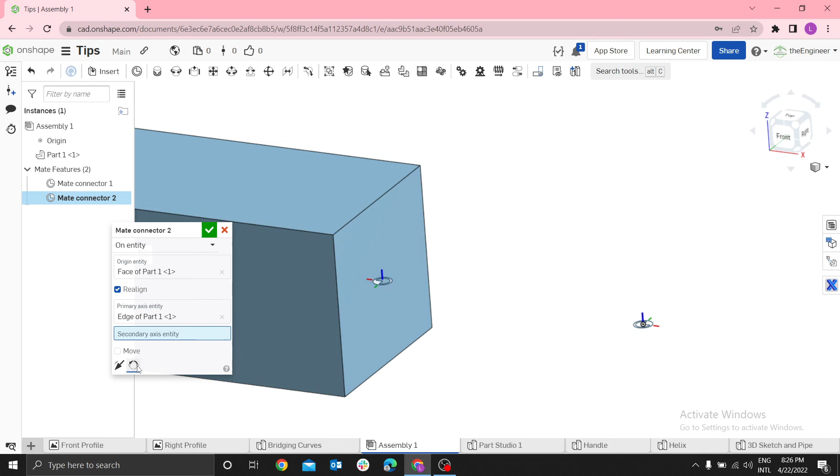Now you can see this mate connector and this mate connector face the same direction. In case X, Y, Z axis are different, you can always rotate along the primary axis like that. Then select OK, and lastly select mate. I'm using fastened mate, selecting these two mate connectors.

As you can see now, the part moves to where it is supposed to be. Okay, that's how you mate your part using a mid origin mate connector.

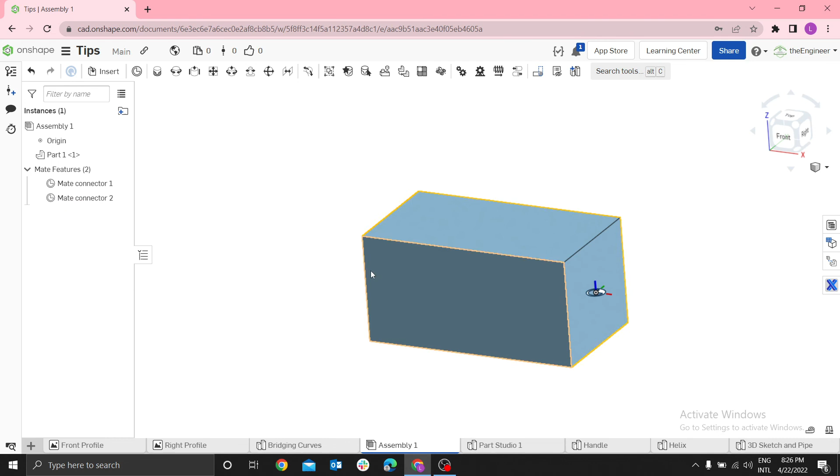Let me delete this mate and illustrate something else. Let me delete everything. Assume I need an angle. This one, as you can see, is horizontal like the x-axis, but I need this body to be at an angle, maybe at that angle to the origin. How can you do that?

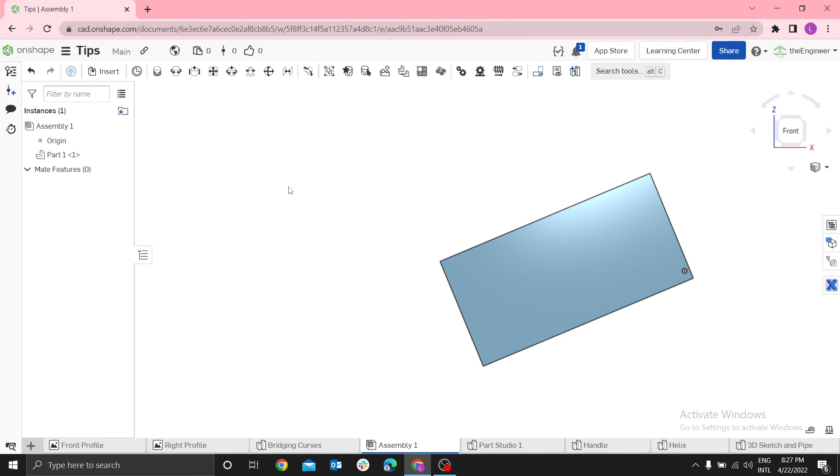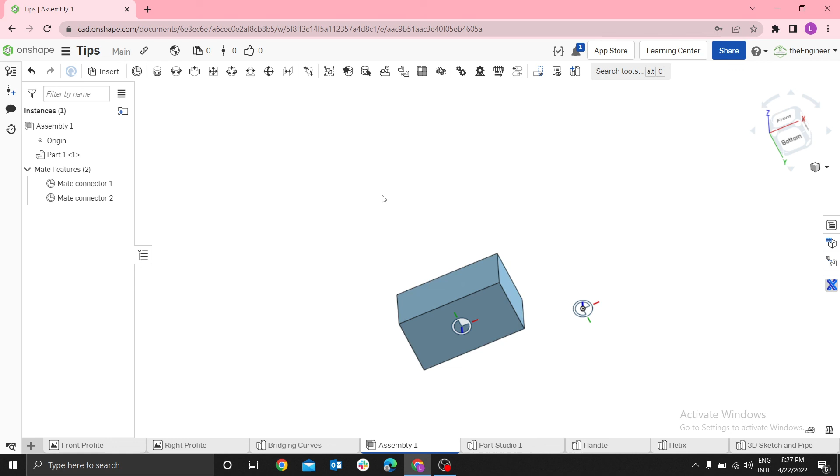Now as you can see, the XZ axis, the primary axis, is facing different directions. That is okay. Then we need to make a fastened mate using these two, like that. Then you use what we call an offset.

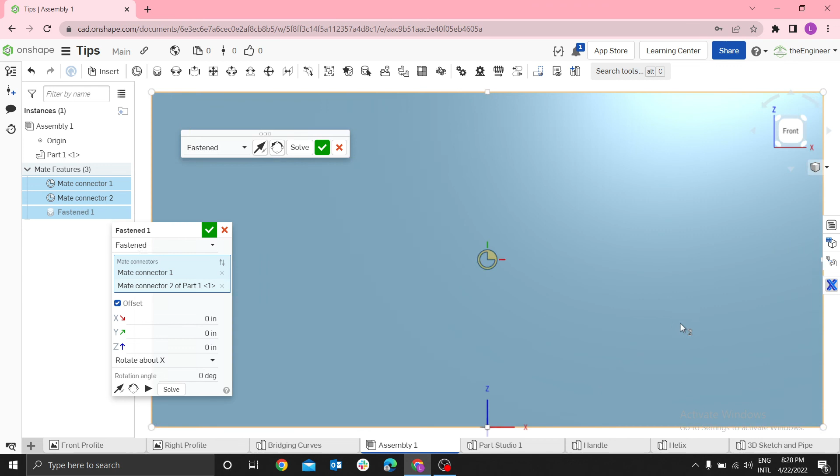You can offset and rotate. As you can see now, we can rotate along the y-axis so that the part can be at an angle. Therefore, rotate about the y-axis and select. If you select 5, you can see the part rotating along the y-axis.

Maybe I need 45, like that. You can see now the part is at an angle of 45 degrees to the horizontal. Thank you.